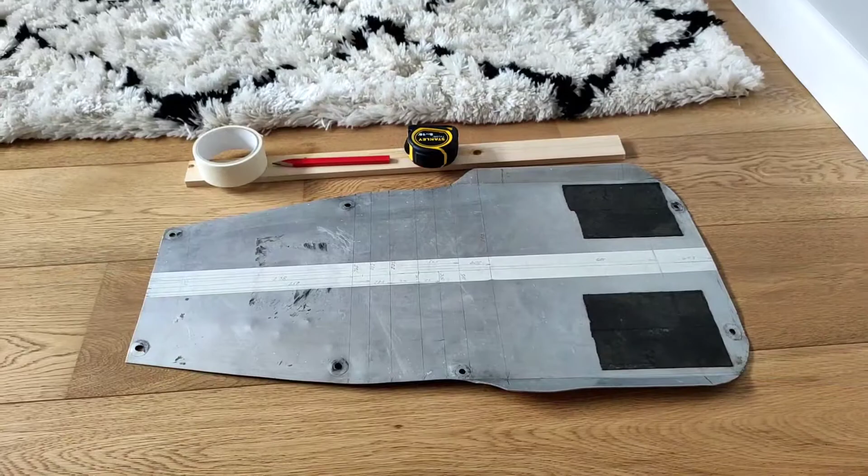So here is a floor tray which came off the Extreme. As you can see, it's not actually in bad condition, but there's a couple of these dents in here. It's a little bit bent. It's okay to use, but not for a restoration, which I'm doing. So what I have done is, first of all, I've put this masking tape over it in the middle to basically mark the center line, which then helps me to take the measurements.

And as you can see, I then started measuring the width of these different places. Now, in some parts it was really simple. For example, there is straight, there is straight, so you can see the straight edges, and up there. But in places like this, where it's curved, you can maybe see it better on the other side, it gets a little bit trickier. So what I have done is I've taken three measurements.

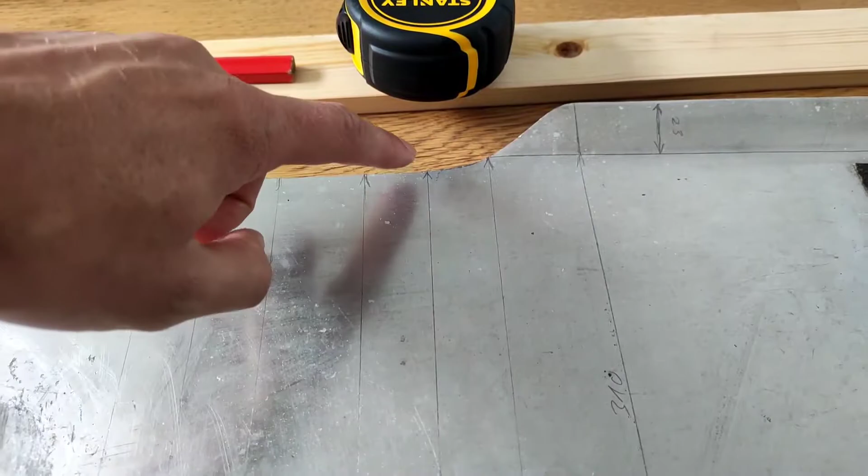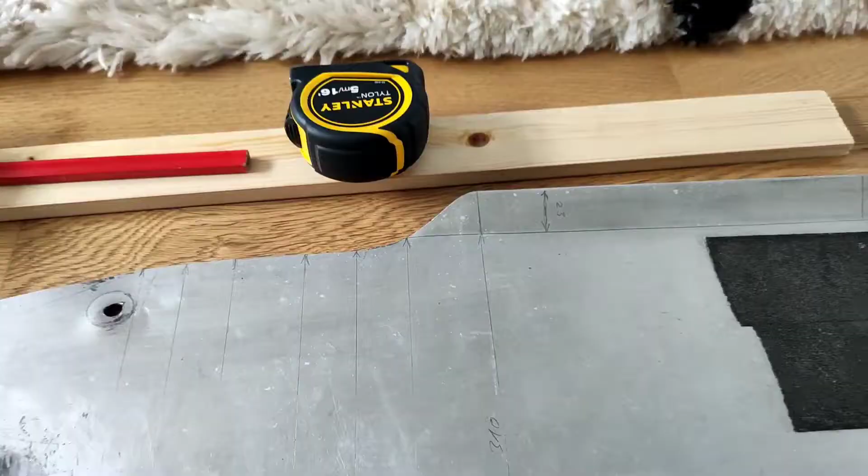First one is where the curvature starts, then sort of the middle point, or where it changes shape, and also at the end point. So I've taken loads of different measurements. As you can see, there's all sorts of different writings on here, including how wide this bit is, what's the overall length, etc.

So all of these I've taken measurements off, and what I'm going to do now is go to the PC and actually put that into Fusion 360, because that's what I'm using for all of my designs, because I really like it. It's a really simple program. So yeah, let's move over to the PC.

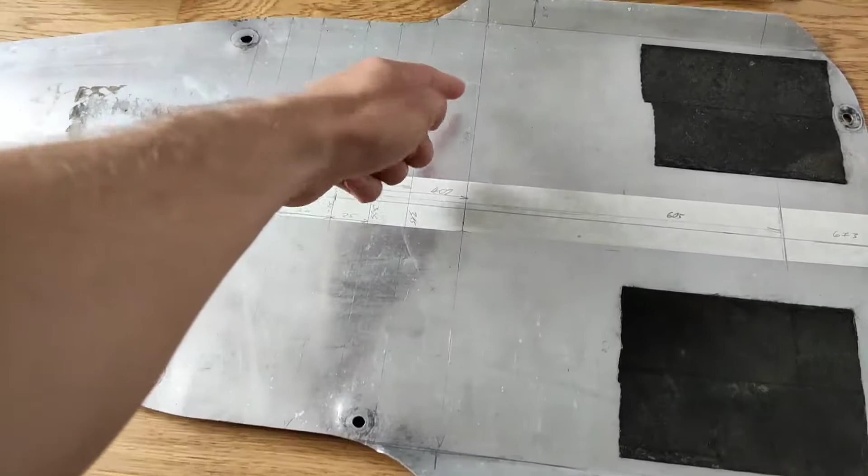There's one thing which I think I have to cover, and that's, if you work with an existing floor tray like this, you need to be careful. In some cases, like in this one, it's not the original one, therefore it's not actually perfect. So I'll show you what I mean. So there's this line, which is actually straight, and it's square to the center line.

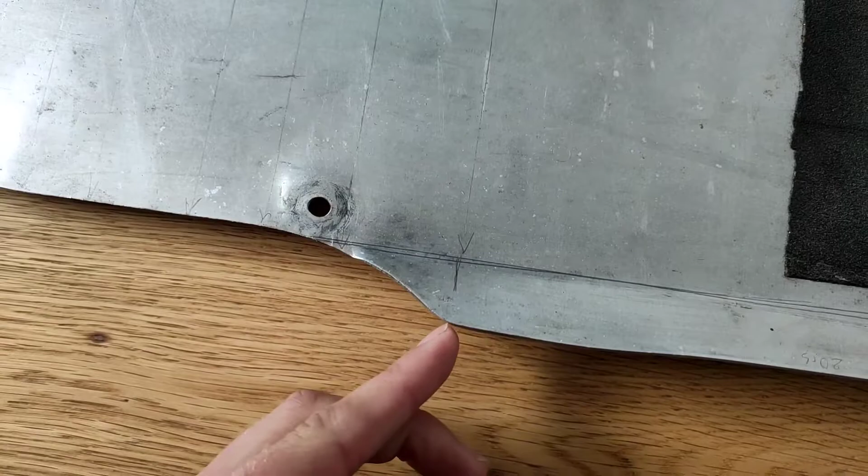However, if you see here, this is the folded up side, it goes all the way out to this edge point. But if you follow that all the way through to the other side, it's a little bit further out. Not by much, but if you are actually designing something, of course, you're going to design it to perfection, and it's going to be exactly the same on both sides.

So just be careful that in some cases, you don't necessarily have to go too mad on these measurements, because what you're going to measure from the existing one is not going to be perfect anyway. So as long as it's a good fit for the kart, and it's going to fit into the actual chassis itself, and it looks good, and both sides are the same, unlike on this one, then it'll be great.

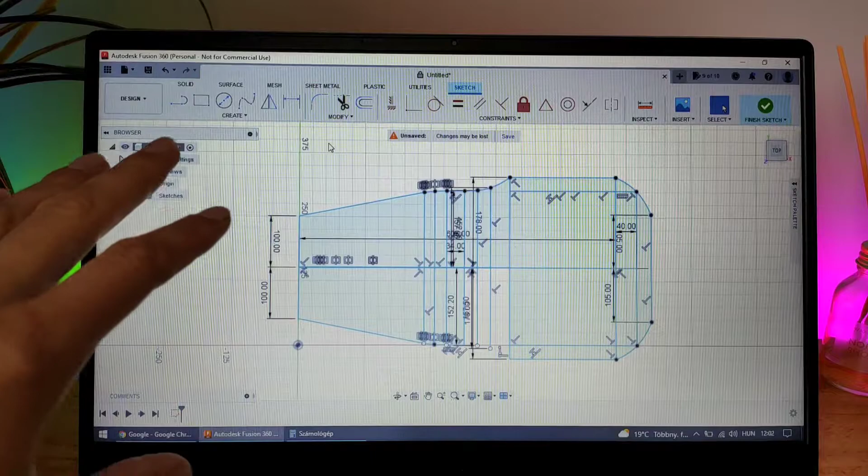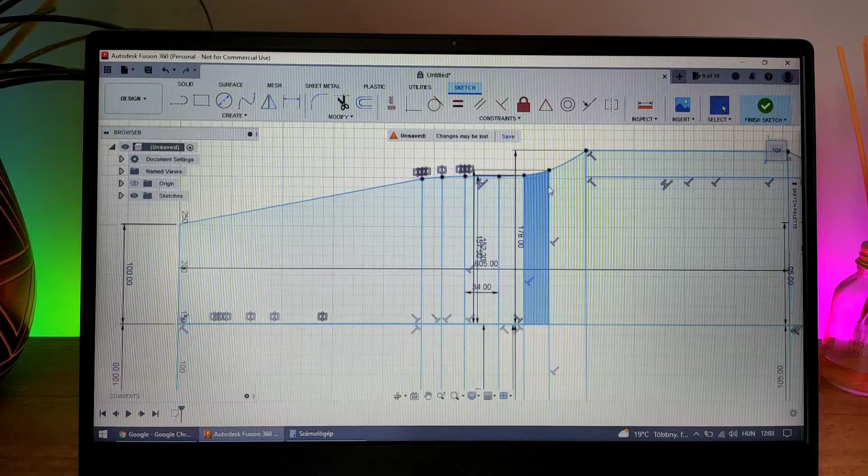So this is Fusion 360. And this is in the sketch mode, so it's all two-dimensional. That allows me to draw up the initial sketch of the floor tray. So what I've done so far is I've drawn up the actual center line, and also the width of each place. As you can remember, I've measured these different bits as to how wide they all are, and I just basically put that into the tool, and I've just drawn that up.

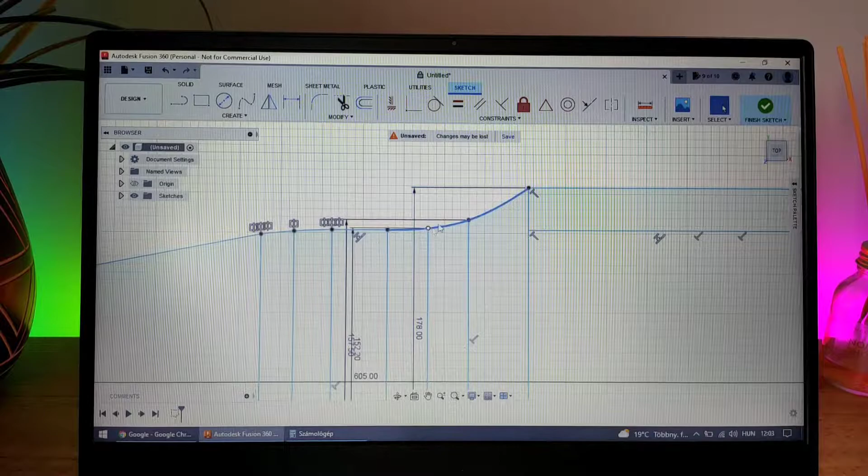Also the width of the folded up place, and wherever there's a curve, I've used this, which is a fit point spline, and that allowed me to basically put a dot in these different locations, and that creates a nice curve on the drawing. So I'm actually going to show you down here. So these are the 1, 2, 3, 4 points which I've measured, and I'm just going to use this. So there, and hit enter. There you go, and that's drawn it for me.

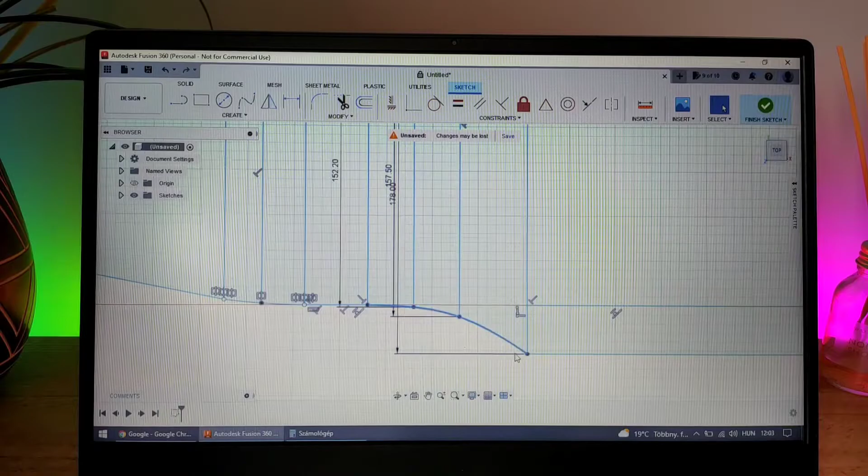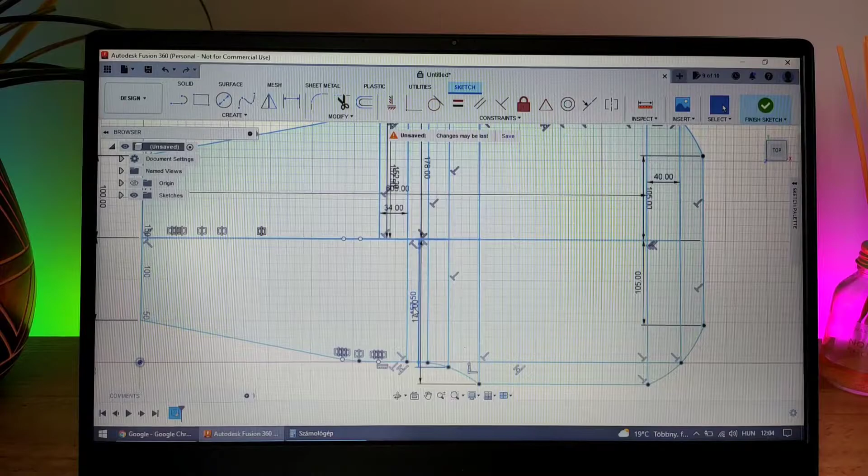And everywhere else for a straight, it really is just as simple as selecting the line command and drawing a line between the two parts. So I've done all of that. Now what I need to do is to get rid of all the extra helper lines, because it makes it an absolute mess, which I don't need, and also to get rid of these measurements, which I also don't need, and then you'll have a better view of how this is actually going to look. So let me just quickly delete them.

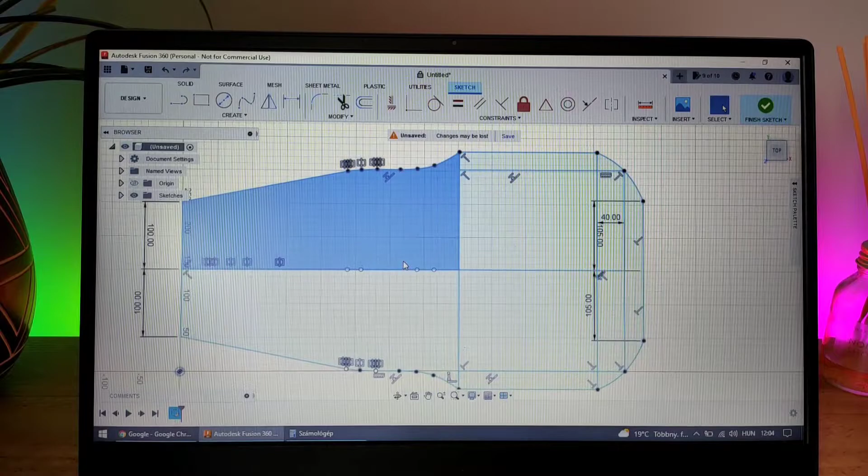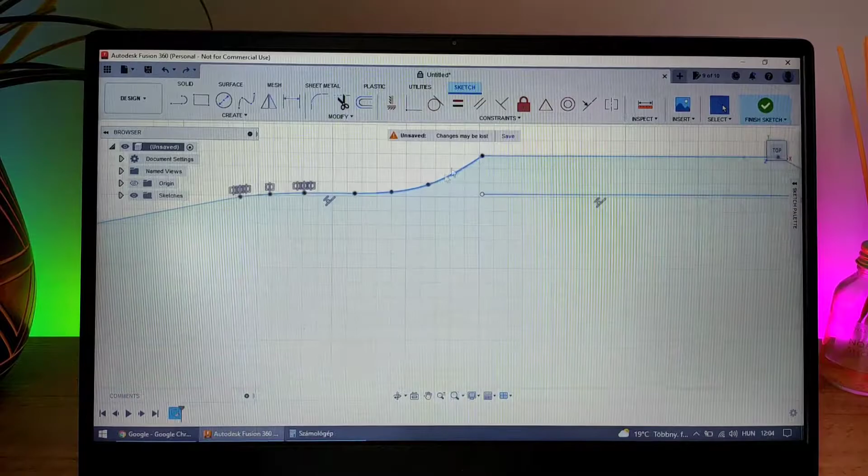There we go. So that looks more like a floor tray. I suppose if I was to delete this, you'll see it even better. And that one, and that one, and that one. Now what I need to do is I need to lengthen this because this is the top part where the folded up place is. So I'm going to use the extend command and also extend this.

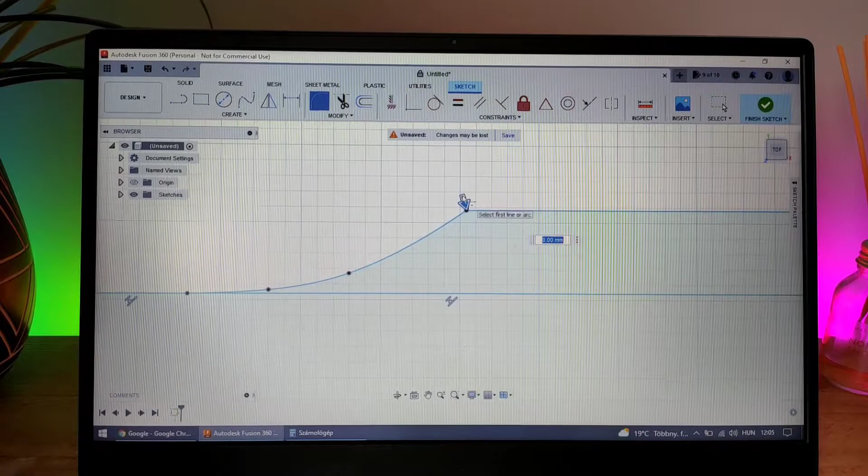Now this still hasn't got any fillet on them. So you can see this is still like a sharp corner. So what I'm going to do is to use fillet on here, and I can actually adjust this to as much as I want it. So literally it's going to be the case of putting the floor tray next to this and then saying, okay, how curved this is on there. So I'm not going to do that right now. So I'm going to do all these small adjustments, and then I'll show you how the actual three-dimensional part is done.

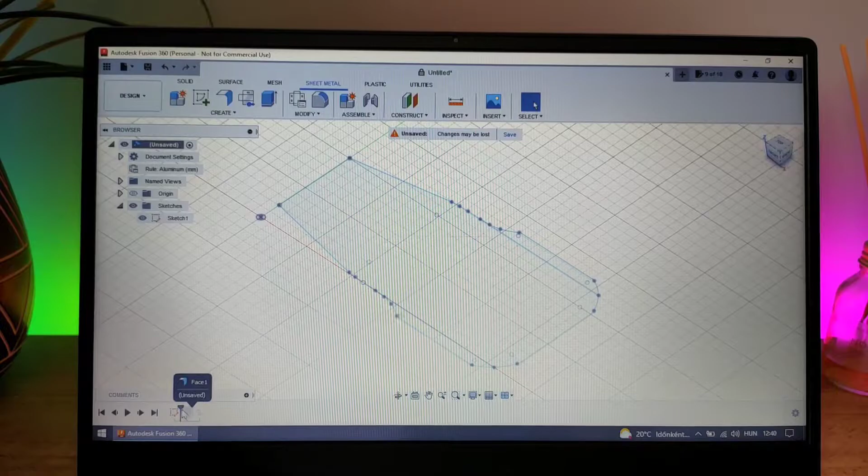So I've applied all the fillets to the sketch itself, and this is the final result. Now in this case, this is nothing more than just a sketch. So what I had to do then, and this is something I've already done, so I'm just going to replay it down here, is to turn it into an actual piece of sheet metal, and that was done by using the face command in Fusion. And as you can see, that's now a piece of aluminium which is in the shape of the floor tray itself.

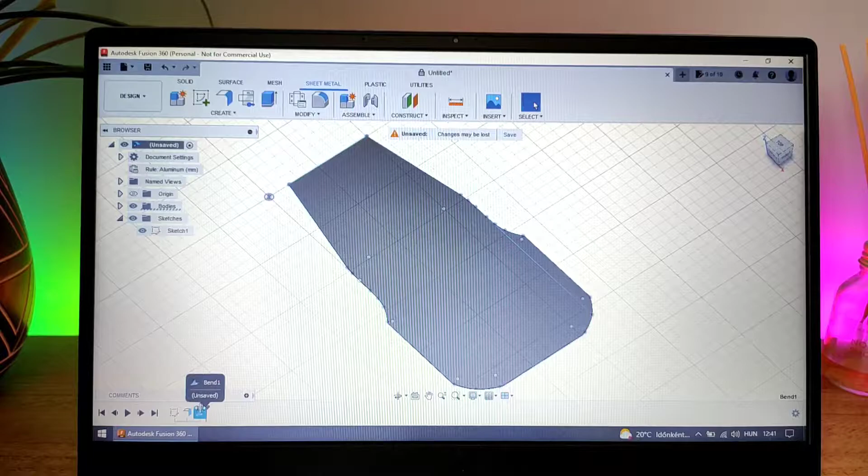However, I still need to bend these two sides up. So the next thing to do was to go to create and to use the bend command. Now this is going to be using the line which I drew in the sketch, and I'll show you how that actually worked because I already bent one side up, and then I'm going to do the other side. So if I replay that again, you'll see that this side has now been bent up. This is nothing more than just basically folding the sheet metal and bending that piece up.

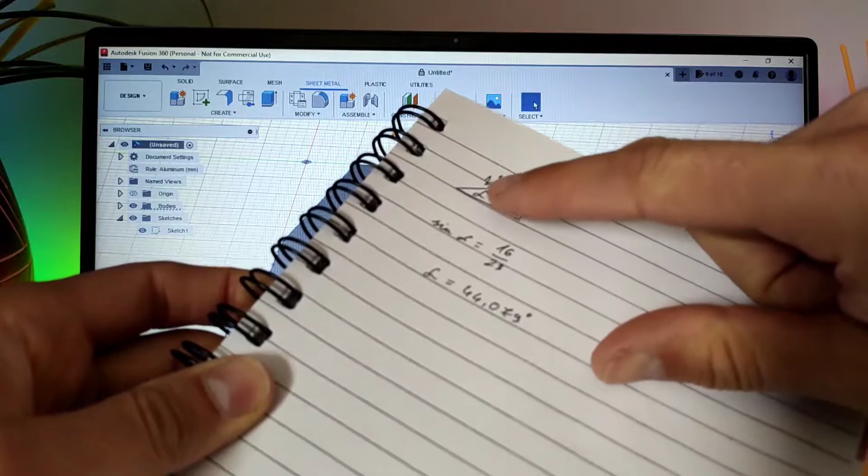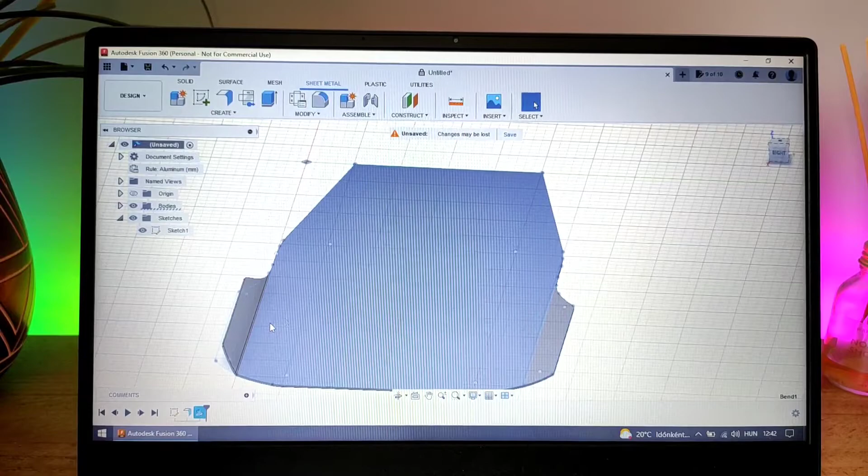Now I have measured the original floor tray, and this bend itself comes to around 44 degrees. So I've not really gone too much into the detail of that, so I'm just going to go with 45 degrees. As you can see, I've actually done some calculations. So that was the alpha which we were looking for. So it was 16 millimeters on this side, 23 mil, which is the width of the bend itself, and that comes to 44.079. I'm not that clever how to use a calculator, but yeah, with that I've come up with the actual 44 or 45 degree angle.

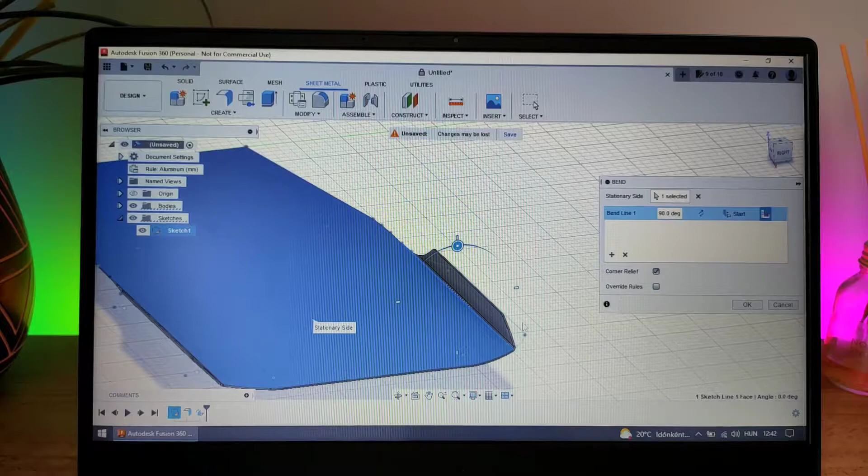So I'm going to do the same now on the other side. So I'm just going to have to select the stationary side, which basically means the bit which is not going to be bent up. So with this, I'll have to select what I'm actually wanting to fold up. Yeah, which is that wing, that little side, and with that I can actually change the angle. So you see there it's changing 70, etc. So then gone to 45 degrees. Boom. And with that, I have a floor tray. Let me zoom out. Woohoo!

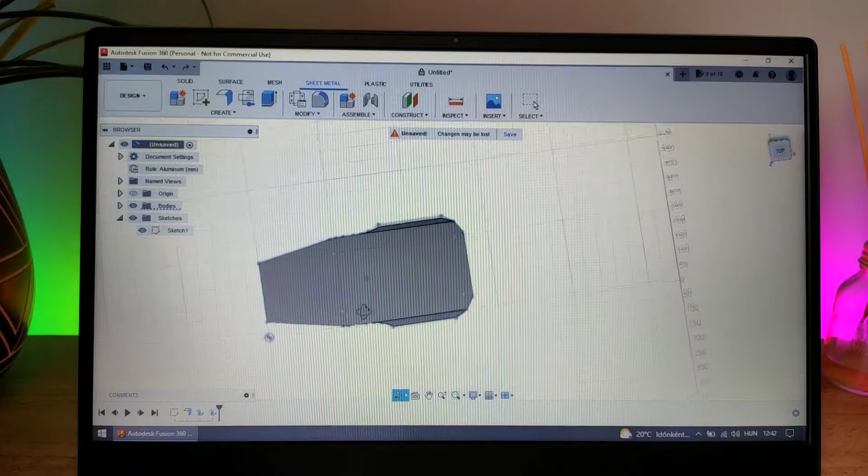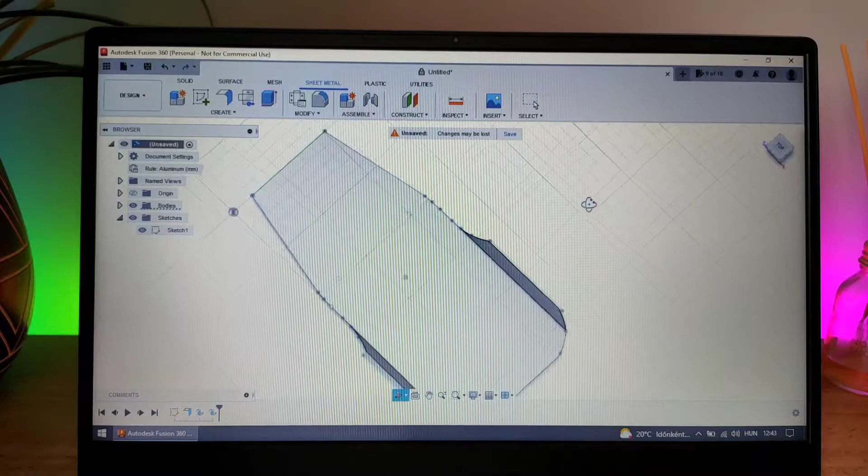So that is how I've designed the floor tray for an Extreme. This is for the big triangle Extreme. Of course, it's not going to fit the medium or the small triangle. I'm not sure about the medium triangle, but definitely not the small triangle. So this is for the early Extreme. And this drawing itself will be exported and will be sent to the company who's actually going to be doing this for me, and they're going to be doing the floor tray and turn this into reality.

So that was it. I know it's not necessarily the most exciting thing to do in terms of karting, because of course driving a kart is the absolute top, especially when it comes to Formula E karts. But making a floor tray and making every piece of the kart absolutely immaculate, especially for myself, is really important. Those who've seen my other kart before know that I'm really into the tiny details, and everything needs to be absolutely perfect. So projects like this, when I have to design something, when I need to create something, are actually quite exciting for me, being an engineer.